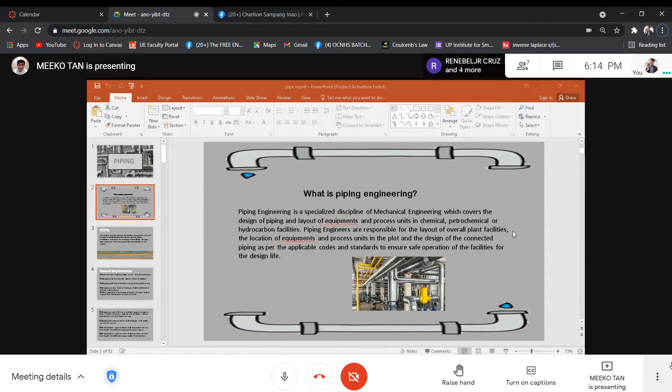The scope: this chapter provides general and specific requirements not only for plant or building piping, but also for general piping installation. It includes power piping system design and pipe color coding for safety and proper fluid identification of the system.

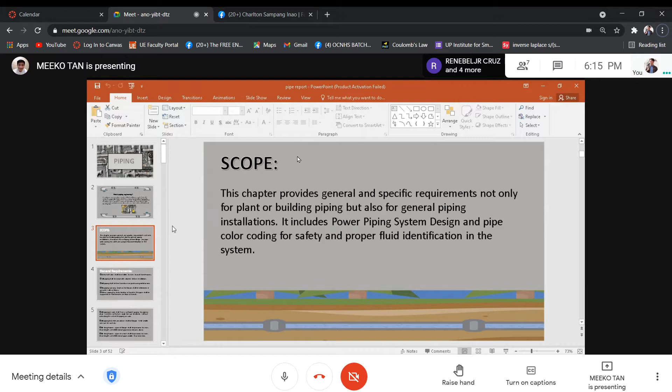All piping shall be reasonably clean before installation to avoid contamination and corrosion. All piping shall be free from burrs or protruding metals inside. No piping carrying steam or hot liquids shall be embedded in concrete walls or floors.

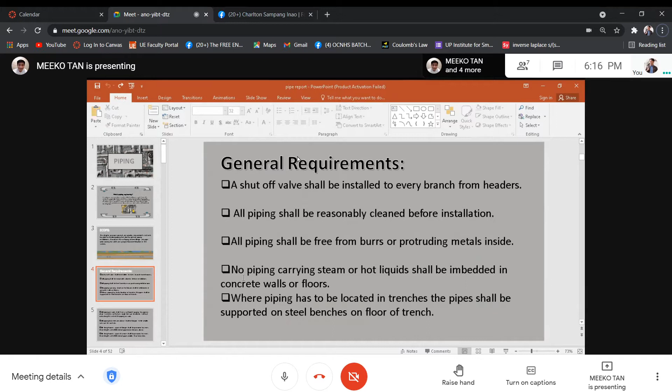Where piping has to be located in trenches, the pipe shall be supported with steel benches on the floor. All piping on racks shall have sufficient spacing for pipe or chain wrenches so that any single line can be altered without disturbing the rest of the piping on the rack.

All piping 63.5 mm and above shall be flanged while smaller sizes can be screwed. On long headers, a pair of flanges shall be provided for every 3 lengths of 6,000 mm of pipes 63.5 mm and above. All flanges,

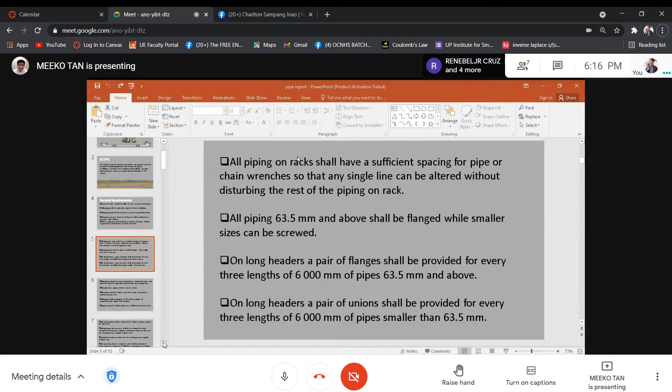All piping subject to varying temperature shall be provided with expansion joints or expansion loops to take care of expansion. If we don't install expansion loops, the pressure buildup in the pipes will increase.

No galvanized piping shall be used for steam. No piping material shall be used which is easily corroded by material passing through. All piping shall be clamped by U-bolts or clamped to supporting racks except steam piping. Piping supports shall be placed at 3,000 mm intervals or less.

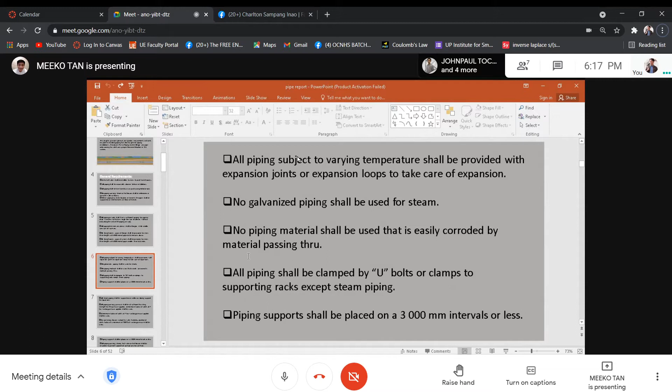All steam piping should be supported on rollers or sliding supports for expansion. All piping carrying pressure should have sufficient bursting strength for the pressure applied. A minimum factor of safety of 4 for working pressure shall be used.

A minimum factor of safety of 4 for working pressure applied shall be used. We need that to avoid accidents.

For conveying liquid subject to water hammer, an additional safety factor of a minimum of 100% of working pressure shall be used.

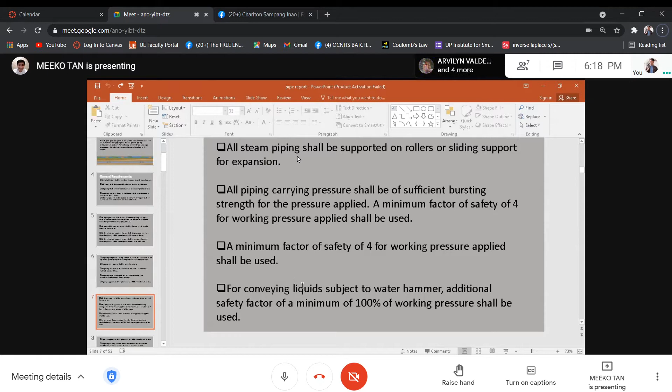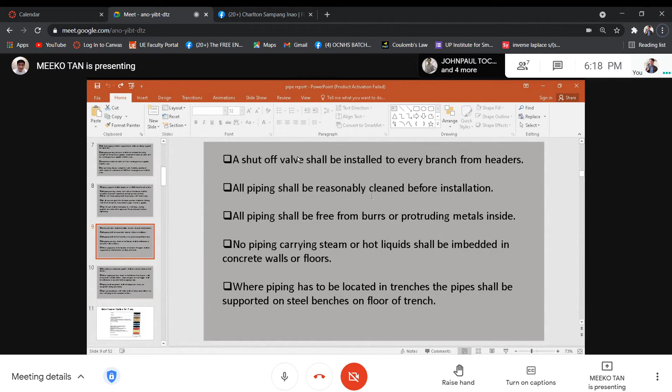No rubber or rubberized gasket shall be used for steam or hot liquids. Where piping carrying steam or hot liquids shall pass through walls of concrete, suitable sleeves made of pipes one size bigger shall be embedded in concrete before piping is laid.

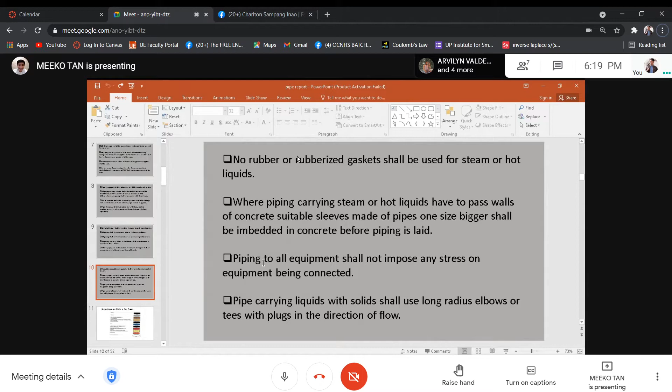Piping to all equipment shall not impose any stress on the equipment being connected. Pipe carrying liquids with solids shall use long radius elbows or tees with plugs in the direction of flow to avoid blockage.

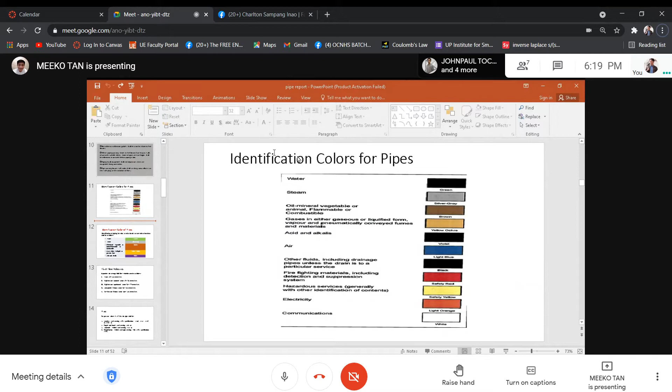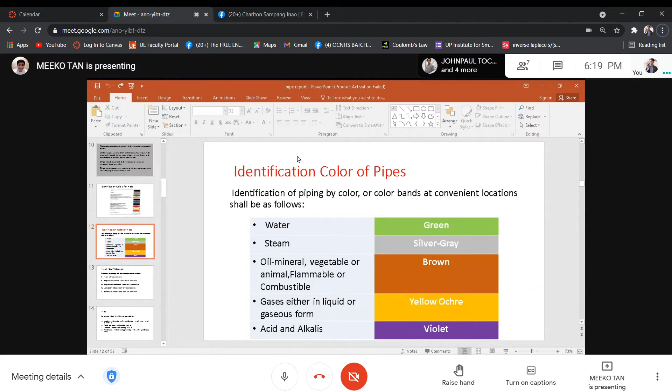For water, we will use a pipe colored green. Steam is silver gray. For oil, mineral, vegetable, or animal, flammable or combustible, it is brown. Gases, either liquid or gaseous form, is yellow, and acid and alkalis is violet.

Now, about fluid velocities. In practice, the average fluid velocities may be as follows: for water, 1.5 to 3 meters per second. High pressure saturated steam is 25 to 50 meters per second, and high pressure superheated steam will be 50 to 77 meters per second. Atmospheric exhaust steam is 40 to 60 meters per second, and low pressure exhaust steam is 100 to 120 meters per second.

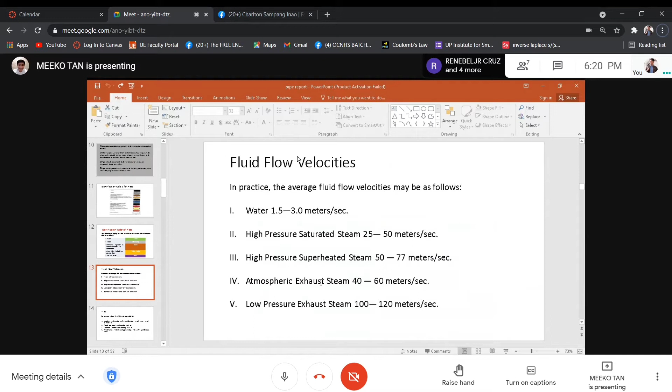Now we'll talk about pipes. For pressure above 4,137 kilopascal, the pipe shall first be seamless steel meeting ASTM specifications A106, A-312, A-335, or A-376, or forged steel meeting A369, or automatic welded steel meeting A312, and electric fusion welded steel pipe meeting ASTM specification A155.

For lower pressure, the range is 1,724 kilopascal to 4,137 kilopascal. Pipe shall be electric fusion welded steel of ASTM specification A-134 or A-139, electric resistance welded steel pipe of ASTM specification A-135, forged steel meeting A380 or automatic welded steel meeting A-312, and finally electric fusion welded steel pipe meeting ASTM specification A-155.

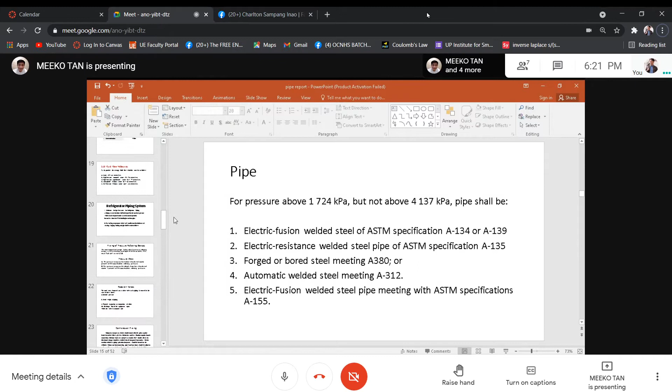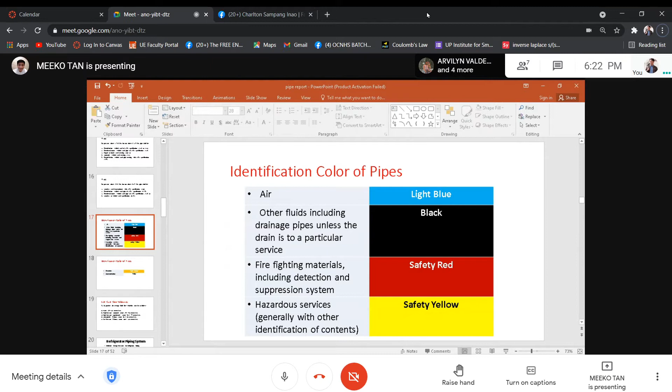Ay, yung kanina, ito naman yung other types of fluids. First is air, light blue. Other fluids including drainage pipe, drainage particular service black, firefighting materials including detection and suppression system is safety red, and for service with other identification of contents is safety yellow. For electricity, light orange, communication, and white.

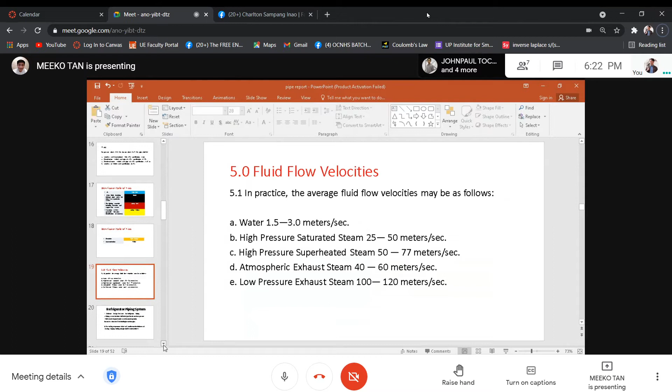So tayo sa fluid flow velocities. Next is the refrigerant piping system.

Minimum design pressure for refrigerant pipe. Piping system for brine shall be designed for the maximum pressure which can impose on the system with normal operation, but not less than 689.5 kilopascal, including for cast iron pipe.

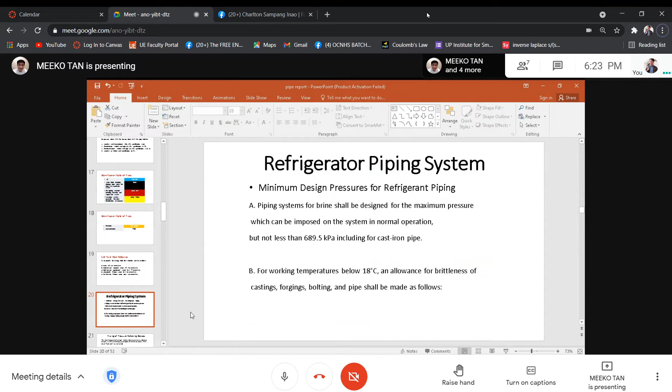Next is for working temperature below 18 degrees Celsius. An allowance for brittleness of casting, forging, bolting, and pipe shall be made as follows.

Piping pressure relieving devices: the most important design factor about pressure relieving devices is the underlying principle of intrinsic safety. They must fail safe or not at all.

Pressure drop. A. The pressure drop due to friction should not exceed a certain percent of the accumulated relieving pressure. B. The pressure drop due to velocity head loss should not exceed 2% of the accumulated relieving pressure.

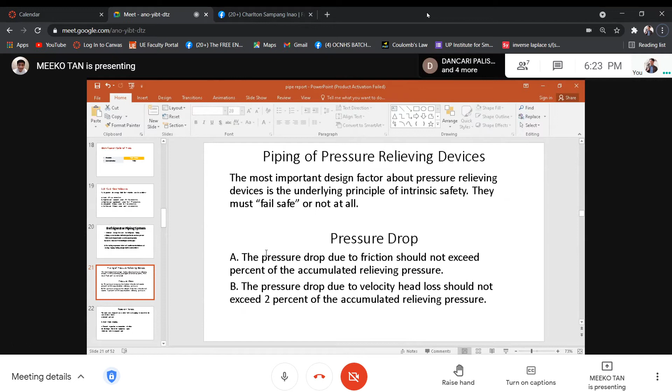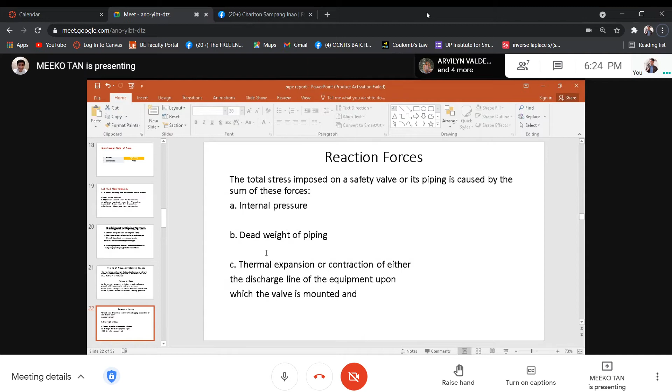For reaction forces, the total stress imposed on the safety valve or its piping is caused by the sum of these forces: first, the internal pressure; second, the weight of piping; third, the thermal expansion or contraction, either the discharge line of the equipment upon which the valve is mounted; and finally, the compressor piping.

Piping in a compressor circuit should connect directly point to point. Bends instead of elbows give less friction loss and less vibration. Angular branch connections will eliminate hard tees and give a smoother flow.

Double offsets for directional change should be avoided. Closely integrated intercoolers with the machine minimize piping. Pulsation dampeners should be located on the cylinders without any interconnecting pipe.

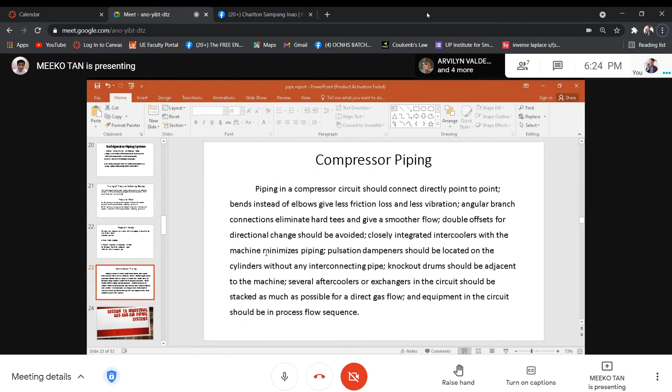Knockout drums should be adjacent to the machine. Several aftercoolers or exchangers in the circuit should be stacked as much as possible for direct gas flow, and equipment in the circuit should be in process flow sequence.

In the PSME code, section 7: the industrial gas and air piping systems.

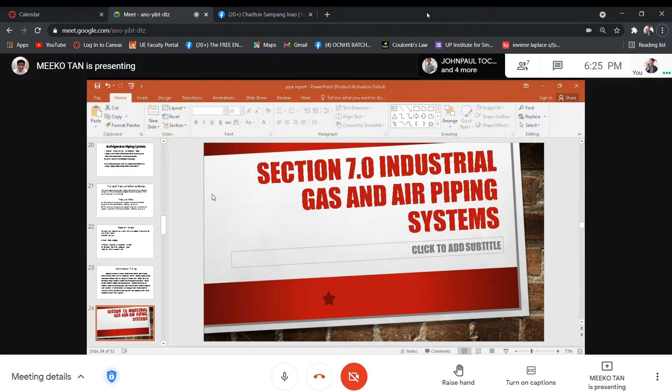Wait. This covers industrial air and gas in mines, power plants, industrial gas manufacturing plants. A. Piping with metal temperature above 232 degrees Celsius or below negative 2.9 degrees Celsius.

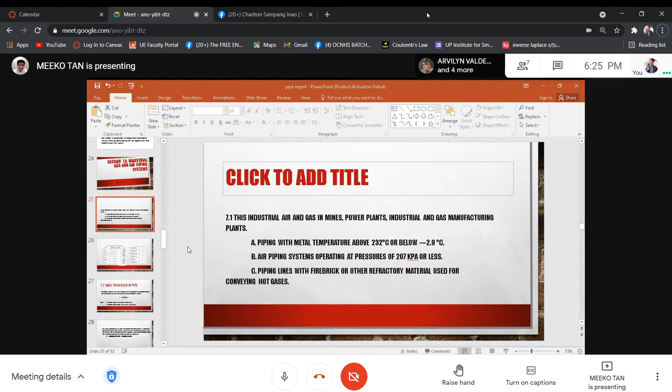Air piping systems operated at pressures of 207 kilopascals or less. C. Piping lines with firebrick or other refractory material used for conveying hot gases.

Ito po yung flexibility factor and stress intensification factor.

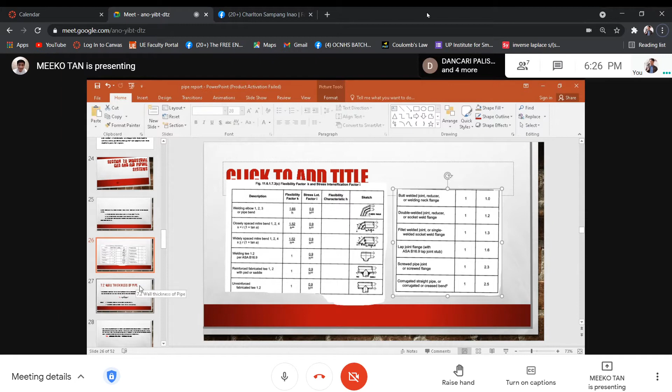First, the welding elbow. Ito po yung given na flexibility factor. Mamaya ipo-provide ko sa inyo 'to, meron kayong reference. Next is the wall thickness of pipe.

The minimum thickness of pipe wall required shall be determined by the following formula for the designated pressure and for temperature not exceeding 232 degrees Celsius. Ito yung formula.

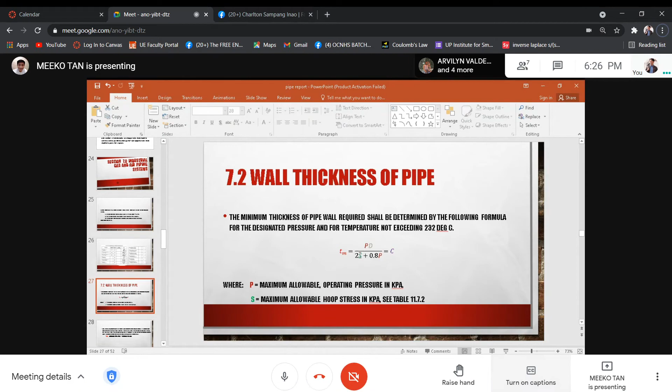PD over 2S plus 0.8P plus C, where P is the maximum allowable operating pressure in kPa, while S is the maximum allowable hoop stress in kPa.

For steel or wrought iron pipe, except butt welded, manufactured under specification not listed in table 11.7.2, ito,

the value of S shall be 0.6K for a service temperature of 38 degrees Celsius or less, and 0.52K for a service temperature of 232 degrees Celsius, where K is the stipulated minimum effective yield strength calculated in the manner described in section 11.7.3.

tm means the minimum pipe wall thickness.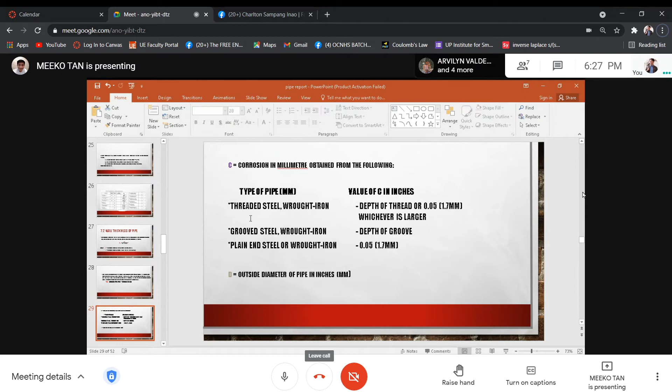Next, alternatively, the effective yield strength may be determined by internal hydrostatic pressure tests on finished lengths of pipe, or on cylindrical samples cut from the results of such tests, in accordance with the following formula.

K is equal to PyD over 2t, where K is the effective yield strength in kPa, Py is the pressure at the yield strength of the pipe in kPa, T is the stipulated nominal pipe wall thickness in millimeter, and finally D is the stipulated outside diameter of pipe.

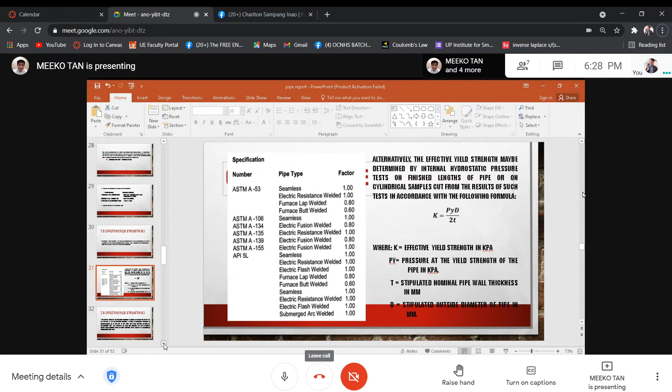Now go to boltings. The following standards shall apply to bolting. Bolting, number 1, is for steam service.

Pressure in excess of 1,724 kilopascal, or for steam or water service temperature exceeding 232 degrees Celsius, the bolting material shall conform to ASTM specification A-193, for temperature exceeding 400 degrees Celsius.

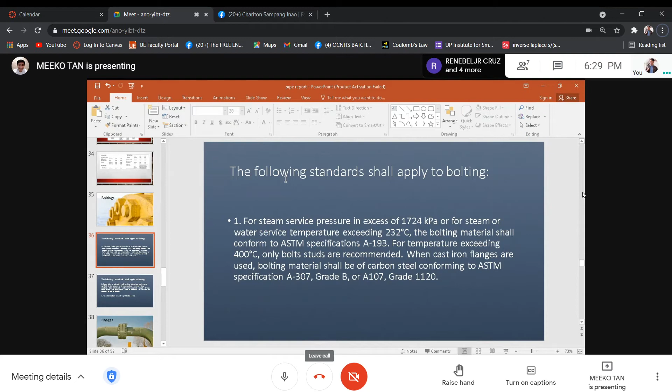Only bolt studs are recommended. When cast iron flanges are used, bolting material should be of carbon conforming to ASTM specification A-307 grade B, or A-107 grade 1120.

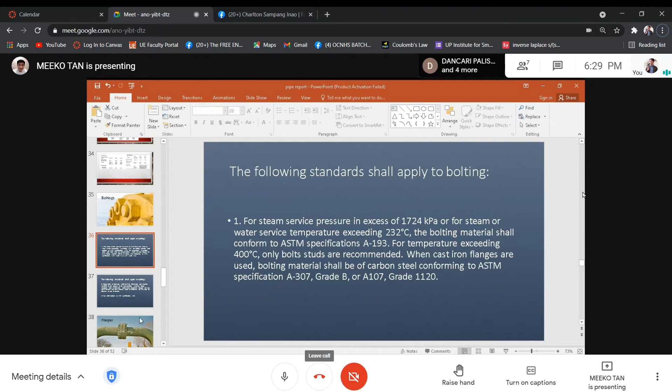Next, the following standards shall apply to bolting: flange bolts or bolt studs shall be dimensioned and material specified for the purpose of the corresponding American flange standards.

Bolts or bolt studs shall extend completely through the nuts, and if desired, they may have a reduced shank of a diameter not less than the diameter of the root threads. C. Nuts shall conform to ASTM specification A-194.

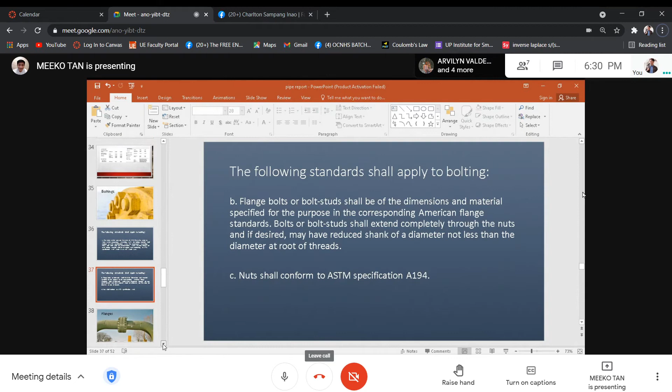As I mentioned earlier, we will talk about flanges. It's a picture of flange.

Requirements for flanges. Flanges shall conform to the American standard B16.5 for respective pressure and temperature, or to the specification set by the manufacturer. Next, the 172 kilopascal class and 862 kilopascal cast iron integral or screwed companion flanges may be used with a full face gasket or with a ring gasket extending to the inner edge of the bolt holes. When using a full face gasket, the bolting may be heat-treated carbon steel.

ASTM A-261 or alloy steel ASTM A-193. When using a ring gasket, the bolting shall be of carbon steel equivalent to ASTM A-307 grade B, without heat treatment other than stress relief.

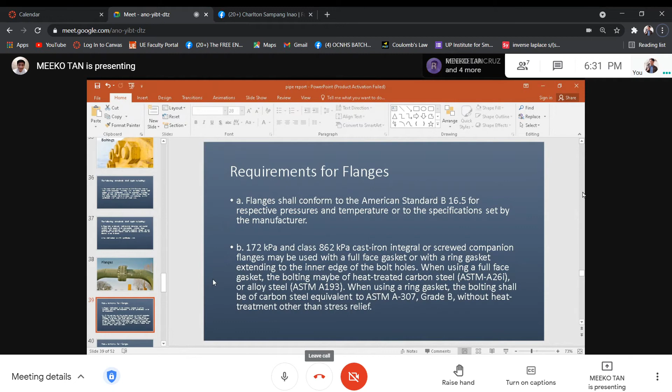Next, when bolting together two class 1724 kilopascal integral or screwed companion cast iron flanges having 1.6 millimeter raised faces, the bolting shall be of carbon steel equivalent of ASTM A-307 grade B, without heat treatment other than stress relief.

1034 kilopascal steel flanges may be bolted to cast iron valves, fittings, or other parts having either integral class 862 kilopascal cast iron flanges or screwed class 862 kilopascal companion flanges. When such construction is used, the 1.6 millimeter raised face on the steel flange should be removed.

When bolting such flanges together using a ring gasket extending to the inner edge of the bolt holes, the bolting shall be of carbon steel equivalent to ASTM A-307 grade B, without heat treatment other than stress relief. When bolting such flanges together using full face gaskets, the bolting may be heat-treated carbon steel ASTM A-261 or alloy steel ASTM A-193.

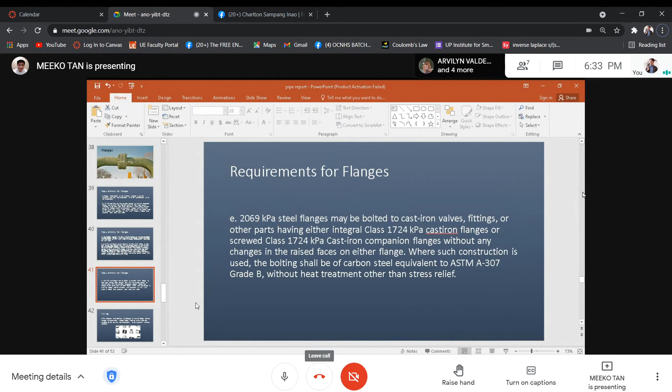Next is the 2069 kilopascal steel flanges, which may be bolted to cast iron valves, fittings, or other parts having either integral class 1724 kilopascal cast iron flanges or screwed class 1724 kilopascal cast iron companion flanges, without any changes in the raised faces of either flange. Where such construction is used, the bolting shall be carbon steel equivalent to ASTM A-307 grade B, without heat treatment other than stress relief.

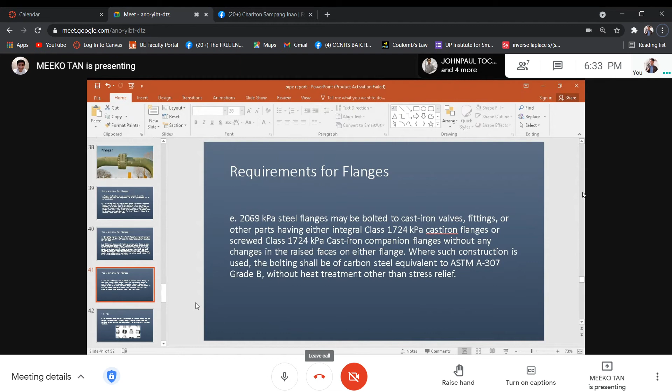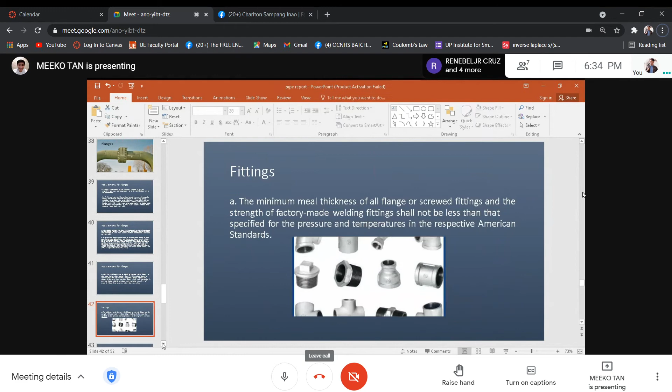All fittings in nominal sizes above 80 millimeter for pressures above 1,724 kilopascal but not above 2,758 kilopascal; 50 millimeter for pressures above 2,758 kilopascal but not above 4,137 kilopascal; and 40 millimeter for pressures above 4,137 kilopascals but not above 17,238 kilopascals shall have flange ends or welding ends.

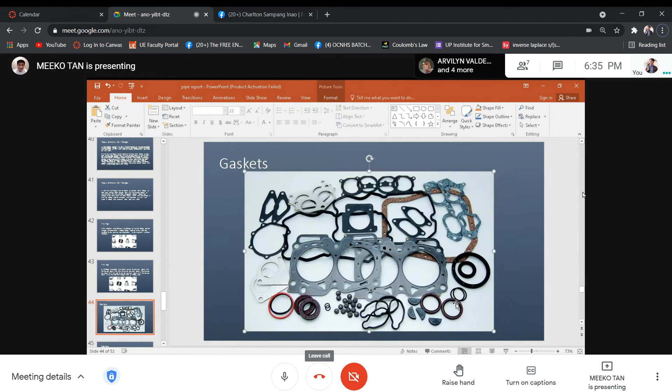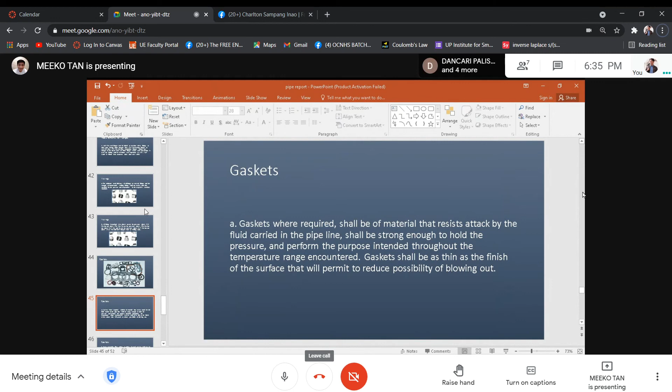Gaskets, where required, shall be of material that resists attack by the fluid carried in the pipeline, shall be strong enough to hold the pressure and perform the purpose intended throughout the temperature range encountered. Gaskets shall be as thin as the finish of the surface will permit, to reduce possibility of blowing out.

Paper, vegetable fiber, rubber, or rubber inserted gaskets shall not be used for a temperature in excess of 121 degrees Celsius, dahil matutunaw lang sila.

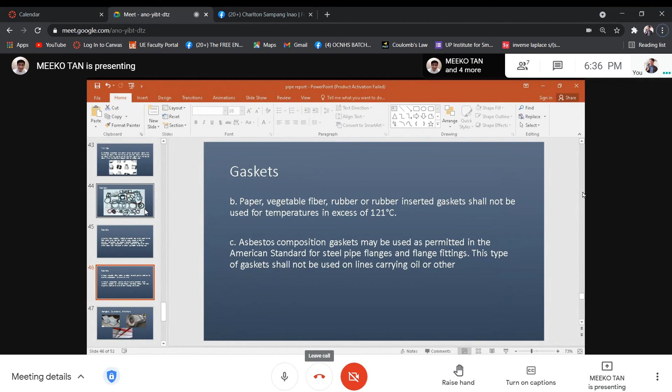Next, asbestos composition gaskets may be used as permitted in the American standard for steel pipe flanges and flange fittings. This type of gasket shall not be used on lines carrying oil or other.

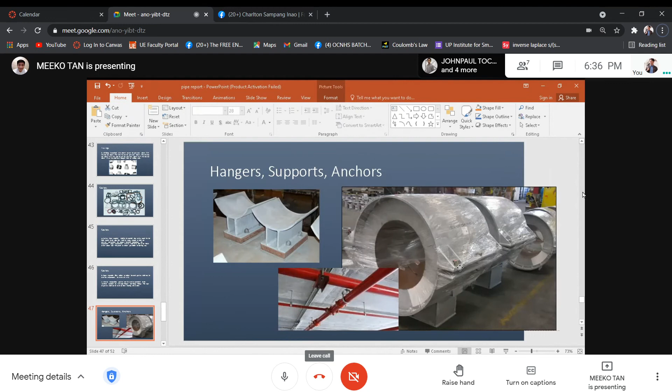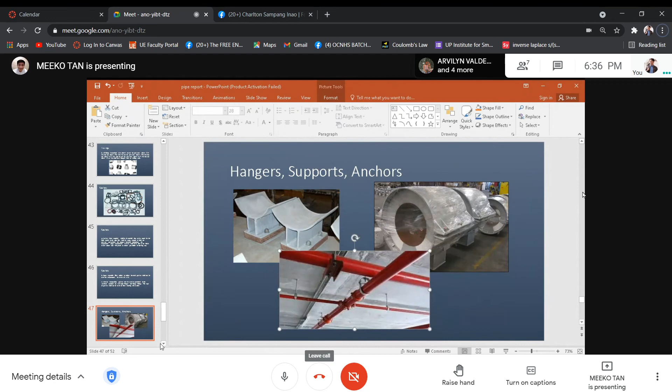Next is piping and equipment shall be supported in a thoroughly substantial and workmanlike manner, rigid enough to prevent excessive vibrations, and anchored sufficiently to prevent undue strains on boilers and the equipment served. Hangers, supports, and anchors should be made of durable materials.

In tunnels and buildings of permanent fireproof construction, piping may be supported on or hung from wood structures. Piping used for conveying fluids at temperature above 121 degrees Celsius is spaced or insulated from such wooden members to prevent dangerous heating, kasi combustible yun.

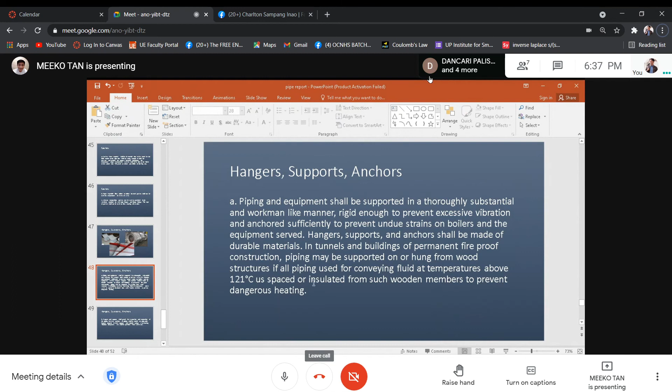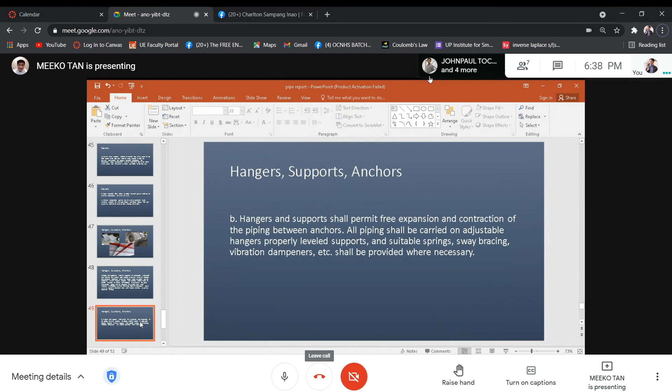Next is hangers and supports shall permit free expansion and contraction of piping between anchors. All piping shall be carried on adjustable hangers, properly leveled supports, and suitable springs, sway bracing, vibration dampeners, etc. shall be provided where necessary.

Next is pipe sleeves. Pipe sleeves ang kailangan para sa effective heat transfer.

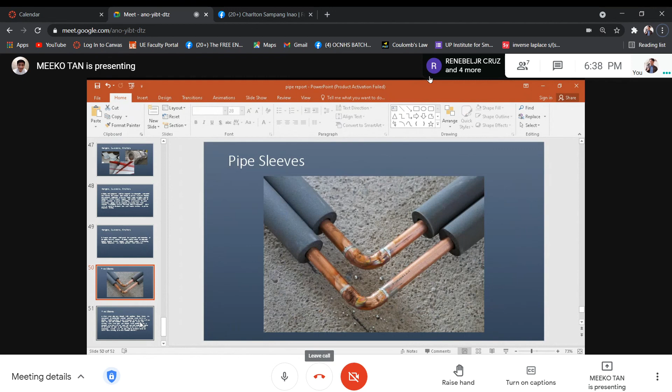Next, where steam pipes pass through walls, partitions, floors, beams, etc. constructed of combustible material, protecting metal sleeves or thimbles shall be provided to give a clearance of not less than 6.35 millimeters, under hot and cold conditions, all around the pipe or pipe and covering.

When steam pipes pass through metal partitions, etc., a clearance of at least 6.35 mm under hot and cold conditions shall be left all around the pipe or pipe covering. In any case, if the fluid temperature exceeds 121 degrees Celsius, the pipe shall be insulated inside the sleeve with covering of at least standard thickness, para mabawasan yung power loss, heat loss.

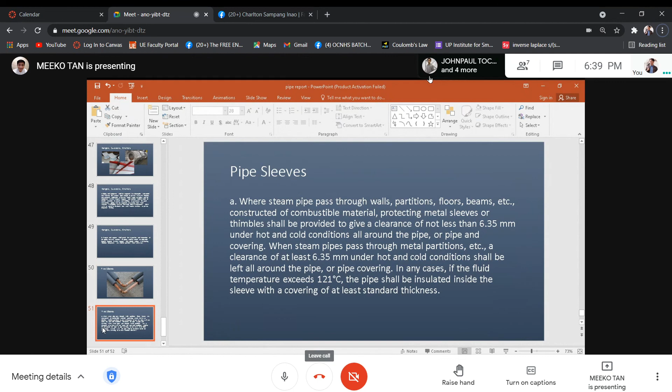Pipe sleeves through walls, floors, partitions, beams, etc. shall not be cast solidly to or built up around and in contact with a steam, hot water, or hot oil pipe. Where such pipes must be installed in a concrete floor or other building member, they shall be protected for the entire length with a suitable protecting pipe sleeve of steel, cast iron, wrought iron, or tile.

Exception may be taken for the preceding rules for pipes that pass through walls, floors, partitions, etc. that must be kept watertight.